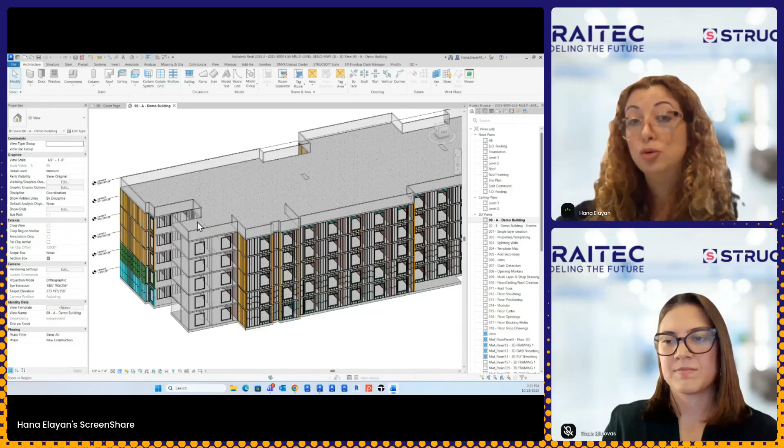Perfect, perfect, okay. So first of all, for those of you who are not familiar with the software, this portion is for you, where I will cover what the software is, really generally speaking, and two of our very well-known features specifically, template maps and quick create.

First of all, our tool is called StrucSoft. It was previously known as MWF. It's a Revit add-on or a Revit plugin. That's why you can see over here that I'm in the Revit environment. This tool is dedicated for framing, and we're going to be framing a few walls live in this presentation, okay?

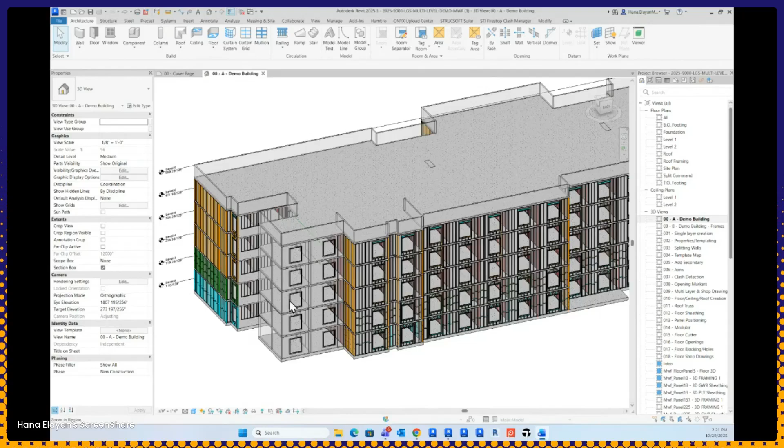First of all, I'm just sharing one of our demo models, and you can see here what you can expect to achieve with StrucSoft, just as an example for a few framed walls. And over here, I've left a few walls empty so that we can frame them live, okay?

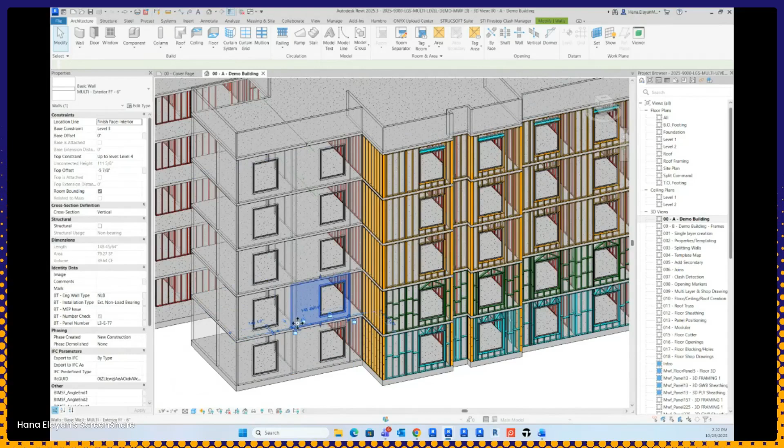So keeping in mind that StrucSoft is a Revit add-on, we do need a Revit model before we can start framing. These Revit elements, like the walls that I'm selecting right now, will act as hosts for the framing that we see over here. So this framing is going to be embedded within the walls, okay? That's why you'll notice that I added a little bit of transparency to the walls of my model.

First of all, when you install the software, you can see that you'll have an additional menu. You're going to have this additional ribbon within your Revit ribbons. You'll notice that it's color-coded.

And if I go to the first button over here and I switch to the wall module, this is the module that DBC are using. So this is the module that we're going to focus on today. You'll notice that the menu expands in blue, and these are the features that you can use for walls. I'm using Revit 2025 for today, but we do support other Revit years as well.

First of all, I will just cover really quick how we prep the model. You're going to need some Revit elements. In this case, we're going to need some walls. Doors and windows have to be added before, but don't worry about changes. The software, you can make changes and regenerate your panel, and this will accommodate your changes.

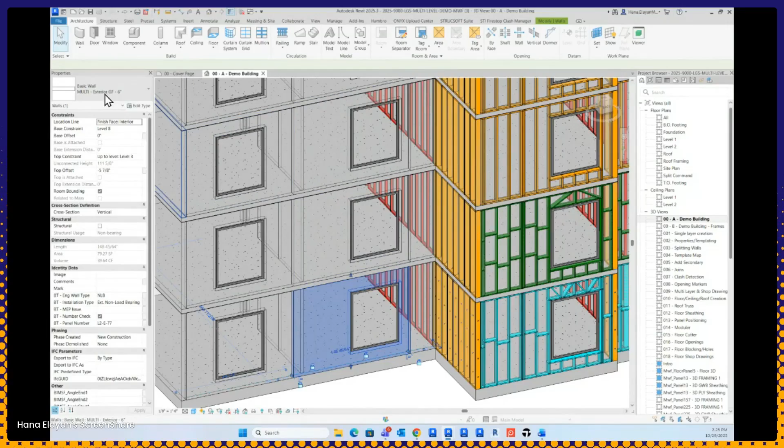Before we start, I just want to highlight that I have a few wall types already prepared for this presentation. So when I created my model, I gave my wall type specific naming. This is going to be very useful later when I add create template maps. This specific wall is meant to be for the ground floor, and I would like to frame it with a template that looks like this.

This wall over here is for the first floor, and I would like to frame it with a template that looks like this, and etc. This is an exterior wall for the upper floors. It's meant to look like this, and I also have interior walls in my project. So just like any project, we have multiple wall types.

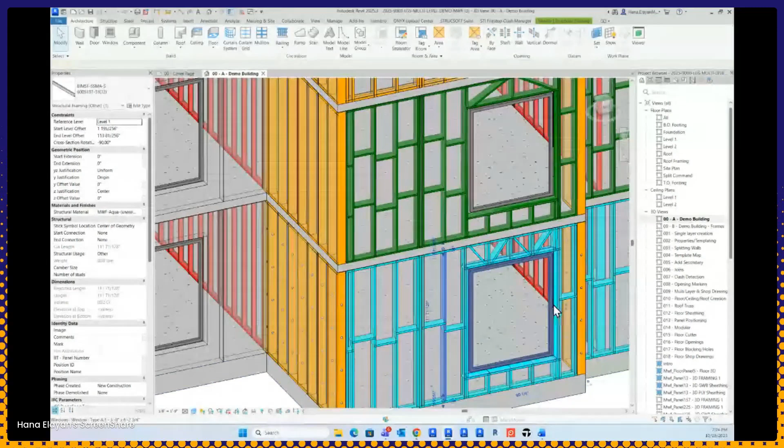This brings us to the topic of templates. So what is a template? Templates are basically the characteristics of a certain panel, including specific features, family types that you might be using, opening details, and other features as well, like adding horizontals and etc. The way it works is that you start with an out-of-the-box template, and then you customize it and you create your own.

You start by creating the Revit wall. You go to the Create tool. You click on Create. You choose a template out of the box. I have my own templates created already. I will use these later. I have one for the ground floor, first floor, etc. But for now, I'm just going to show you a default out-of-the-box option.

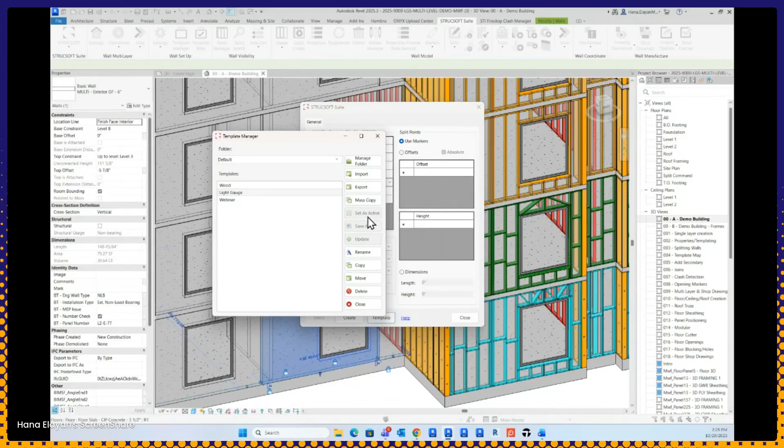I have something called light gauge and wood, and something that I had just pre-created. But you'll receive, if you're using StrucSoft Suite, you'll also receive wood templates as well. I'll be using light gauge for now. I'll set it as active, hit close, and I'll hit create. And this will create my first panel. From there, I can start to modify this panel in order to create my template.

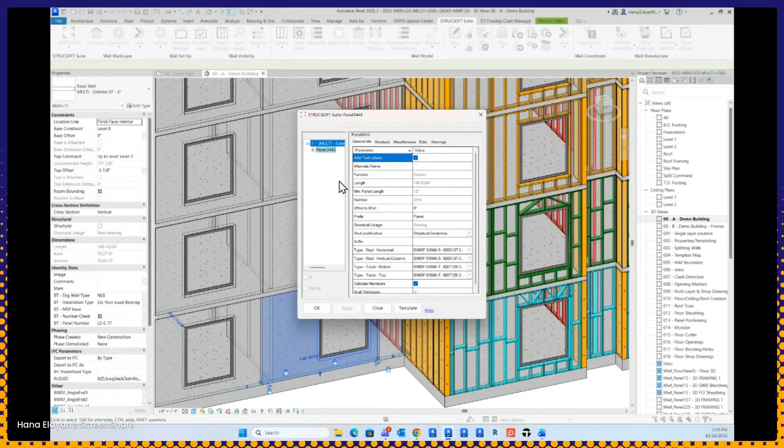I'll receive this dialog box where I can make changes, but for now I'll skip that and say OK. Perfect, so this is our first panel. It's a very simple panel.

There's nothing fancy here, but I can start to add more and more features, which brings us to the topic of the properties preview menu that we're very excited about because we've improved this feature and it's looking really great. In the panel settings, you can make changes to your studs, like the horizontals, vertical, bottom, top.

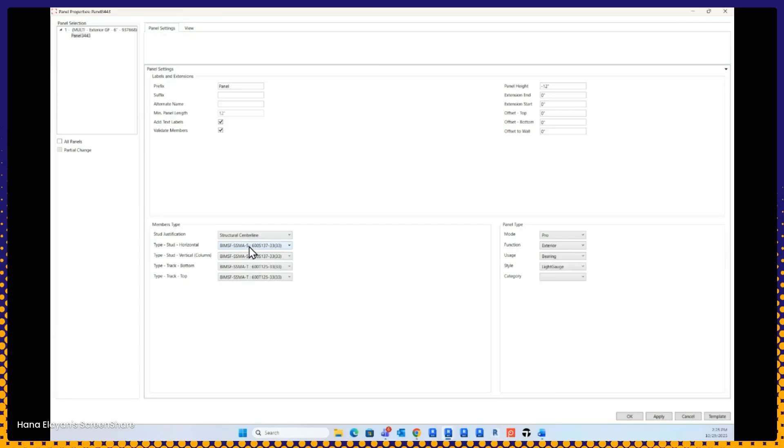You can add your own Revit families. You do receive these types out of the box. If you go to the view here, you can see that we have available features, and here you can see a preview of your panel.

You can start to add features. For example, I'll just do something easy for today, like adding horizontals, just to show you one of my personal favorite features. So I'm going to add horizontals from the beginning to the end of the panel. I will choose the family that I want to use. I just picked something like this.

There's the justification, you can split the horizontals, you can add a stagger, you can also insert clips and add punches, but I'll keep it very simple for now. You can add the number of horizontals. I'll click on add, and then I'll click on apply.

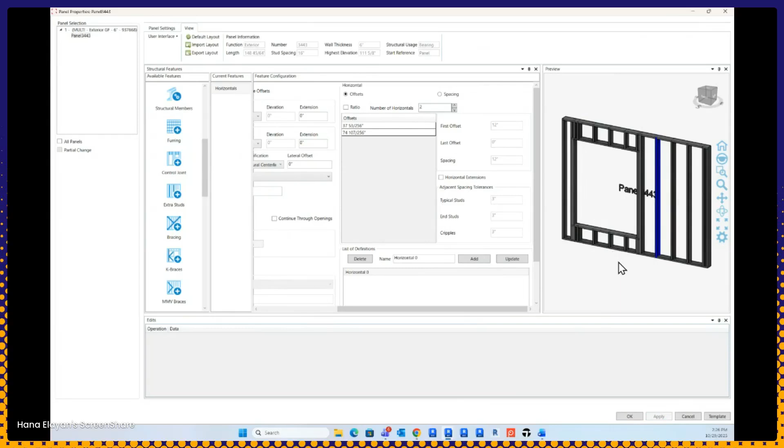And here you'll start to see the changes happening in your panel in this preview. Then when you're done adding your changes, you can go to template, save as, and you can save it in a folder and call it whatever name you like and use it over and over again.

Let me just call this webinar 2, for example, and then you'll find it in your folder and use it over and over again.

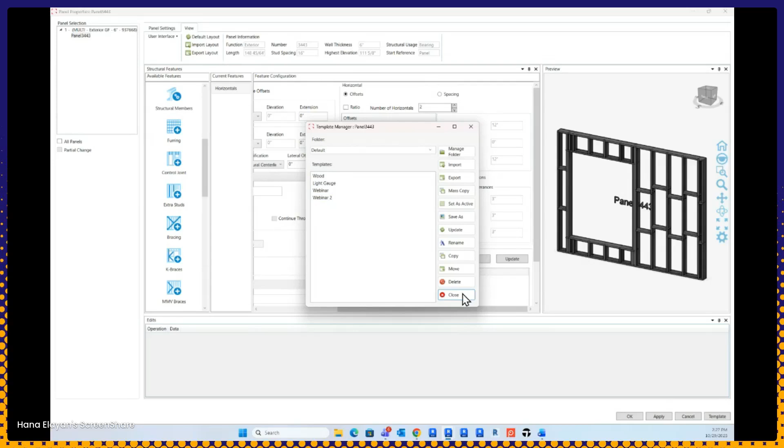And here you're going to see the end result. So I've already pre-created some templates. Let's try them now, but now we're going to talk about another very important feature, which is the quick create and the template map.

Quick create is the feature that automates this process so that you don't have to panel one wall at a time. The quick create tool is used in conjunction with the template map that I'm going to show you right now.

You can create multiple template maps, as you can see here. I already created several, but I'm going to use this one right now. This basically tells the software what to do when it finds a certain Revit wall type. You can see here that I have different wall types I can choose from this dropdown, so I'm basically choosing Revit wall types and matching them with StrucSoft templates that I've pre-created.

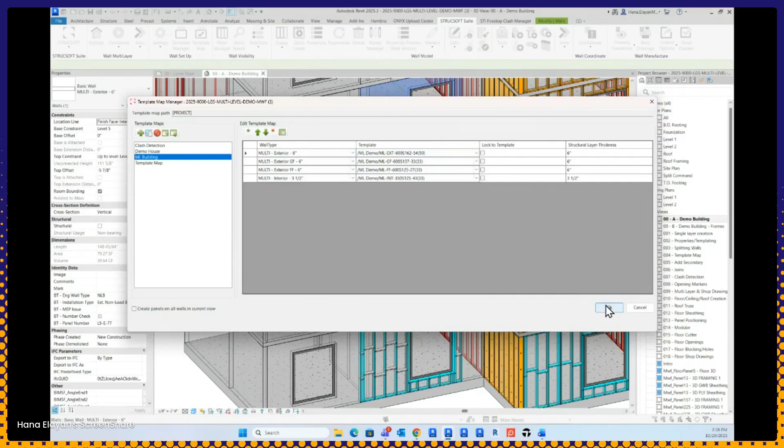And I need to make sure that this is highlighted in blue. I hit OK, and now I'm ready to frame my panels. To frame my panels, I need to make a selection, just like you see here, just a regular Revit tool that you use every day.

I've selected 5 walls. I'm going to frame them all at the same time, and they're going to look different, since each one of them has a different template. I'll hit the Quick Create tool.

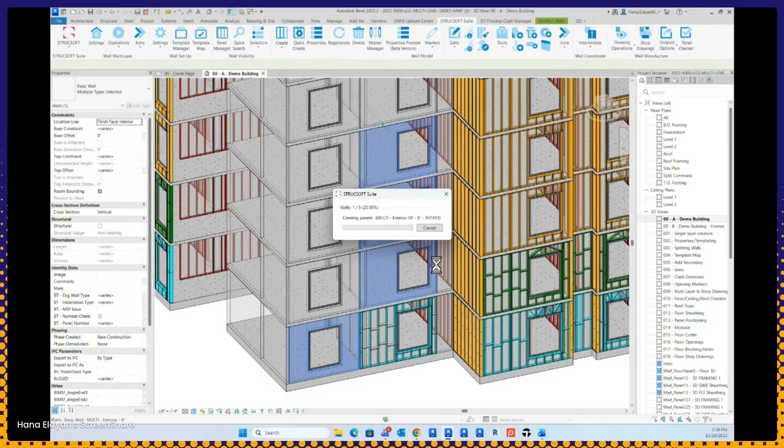What's happening now is that the software is going to start framing. It's actually matching wall types with templates, just like we specified. The time frame will vary, depending on how many panels you're framing at the same time, how big the project is, how complex your panels are. Of course, it also depends on your device, so the time frame will vary.

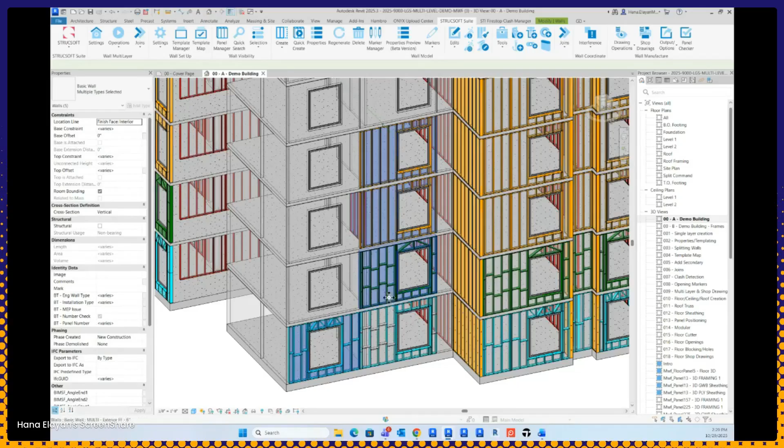Okay, perfect. I thought it would take longer because I'm sharing my screen and in a call, but it wasn't bad. And here you can see that the software has framed these panels using the templates that we specified.

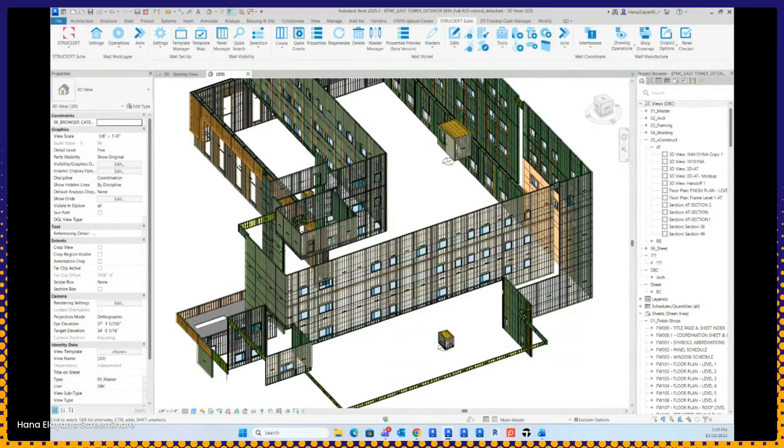Now that we're done with the first portion of the presentation, we're going to jump into a model that was actually provided to us by the DBC team. Thank you so much for this wonderful model. I'm using a model provided by the DBC team, showcasing some of the features that they like to use. We're going to focus on a few specific features that the team has mentioned they really like, one of them being marker lines.

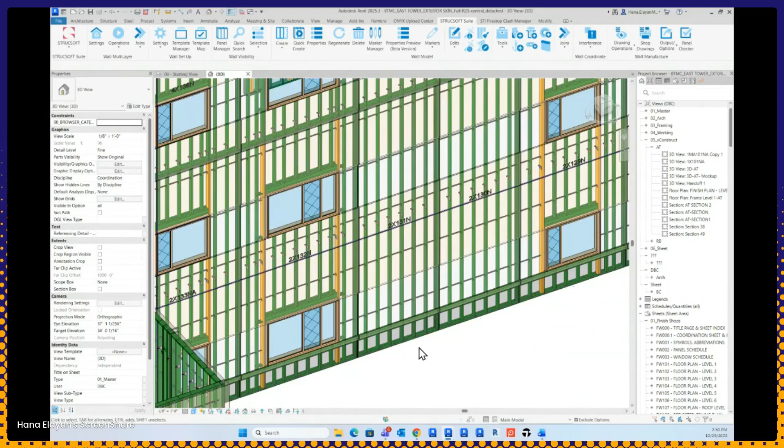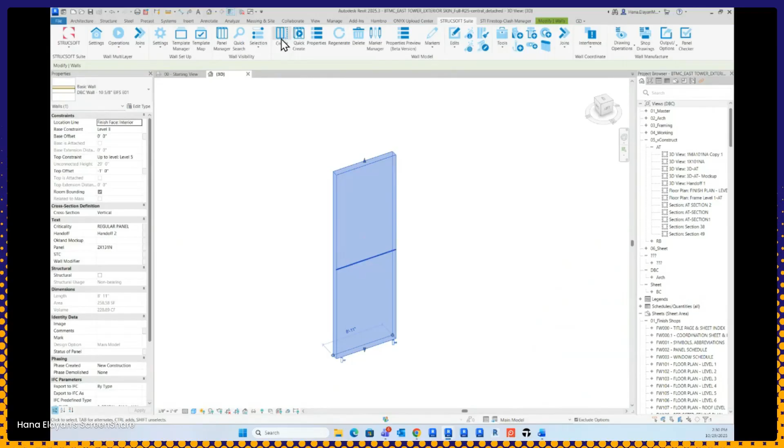To do that, I will start with an empty panel. I'll create a wall first, using a Revit copy, and make this wall over here. Let's isolate it, I hit BX on my keyboard. This is a wall type, and you can see that DBC have their own wall types. I will start by using create, and I'm going to choose a template, something like this. I'll set as active, close, and create.

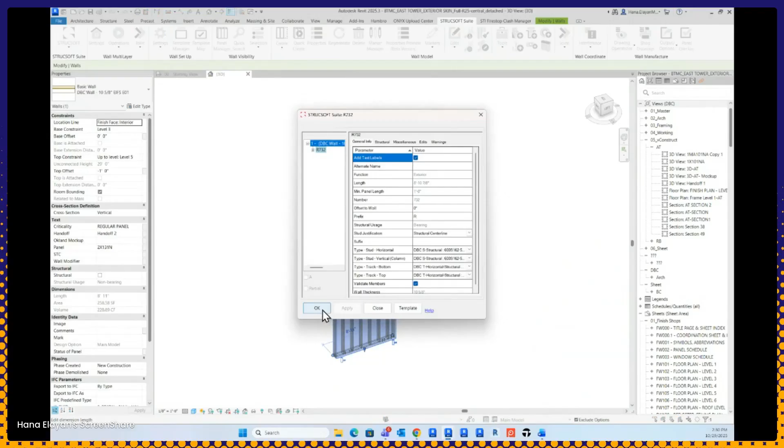I just created a panel, and as you can see, their template already has some very neat features. It has their own family types, and it also has, for example, here they're using an anchor bolt, which is another tool that you can find in this software.

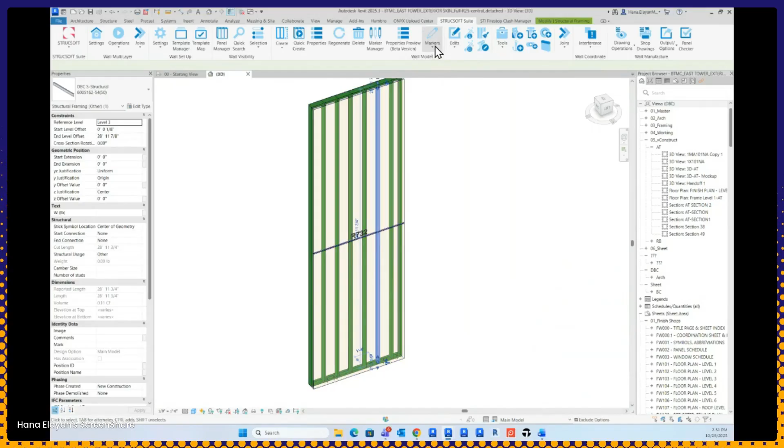I'm going to be talking about marker lines, which is a very popular tool that will allow you to create different things. DBC likes to use marker lines for their CRC channels and punches. To add a marker line, you select a member of the panel, go to markers, and click on Create Marker Lines. From this dialog box, I'm going to choose horizontal lines.

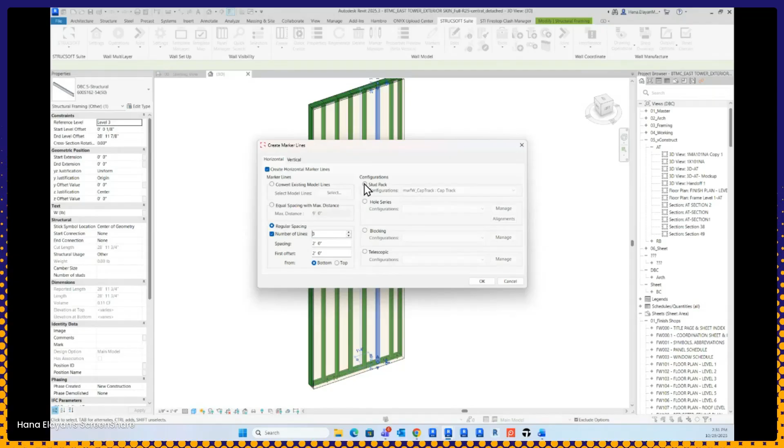Regular spacing, I'm going to use 3 lines. That's all I need for right now. You specify the spacing and the first offset. You can, by the way, add the features right away, a hole series, blocking, and other configurations, but I'm not going to add them now. I'll come back to them later. I'm going to say OK, because I wanted to show you how the marker lines look before you add any features. They look like regular Revit lines.

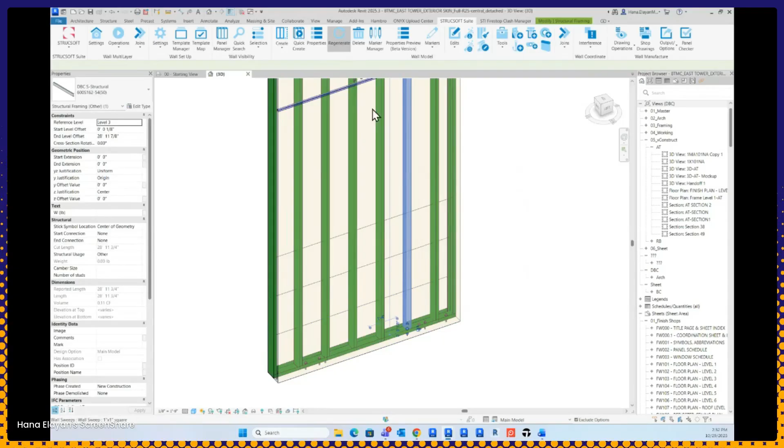They are regular lines, but in the back end, they're also coded with StrucSoft features. To add a feature, I need to select this line, go to the properties, and here I'm going to choose blocking. I'll add blocking first, using this one right here. I'll say OK. You won't see anything until you regenerate the panel. And there it is - this is the CRC channel.

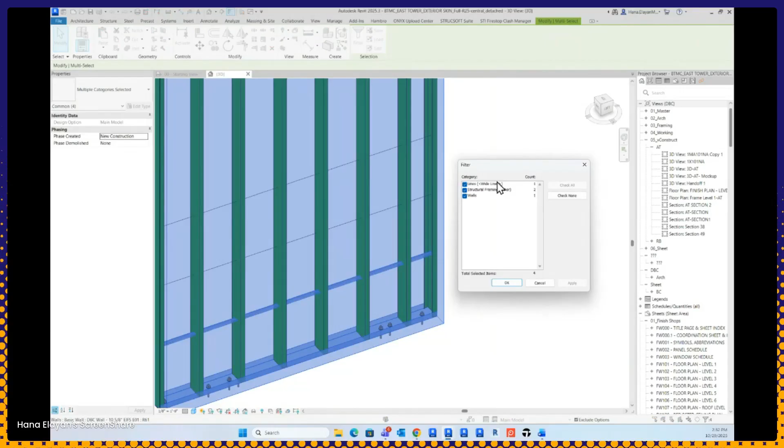What I can also do is add another feature as well as that feature. I just made a selection, I'll use the filter tool just to select that line again. And I'm going to add another feature, going to the properties, and add a punch basically. I'll use this one, and I'll say OK. I'm going to regenerate the panel. And here's the end result.

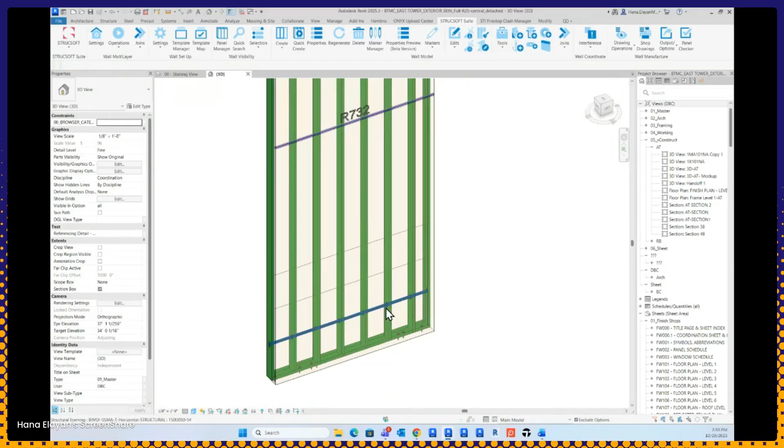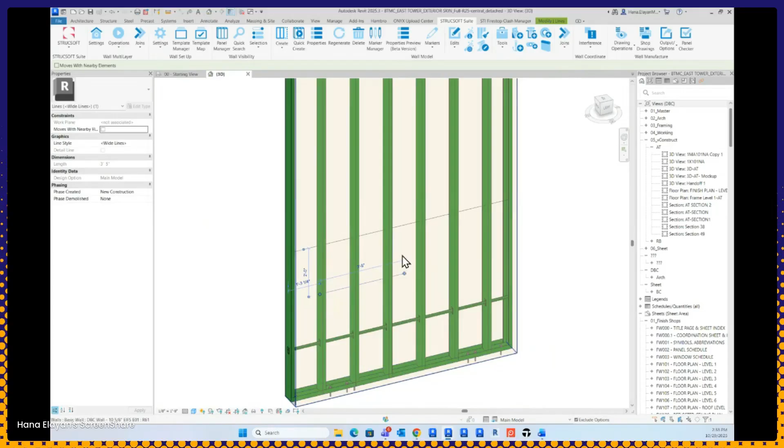The cool thing about these marker lines is that they're very, very flexible, not just the features you're able to use them for, but they are flexible themselves. I'm going to move these lines to specific locations like this. I'm actually going to keep one a little bit extended on purpose just so you can see what you could do - you have the option to extend it or not.

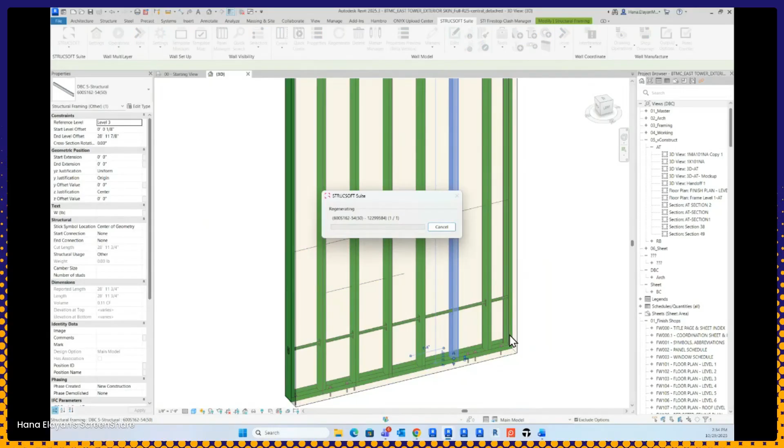And I'm going to add these features again using properties. I'll use the same blocking, this one, and the same hole series. I'll say OK, and when I regenerate, this is the end result.

Sorry, I'm just going to switch maybe to my headset. I just want to check with my team. Does it sound better? Is this better? Okay, perfect. Sorry about that.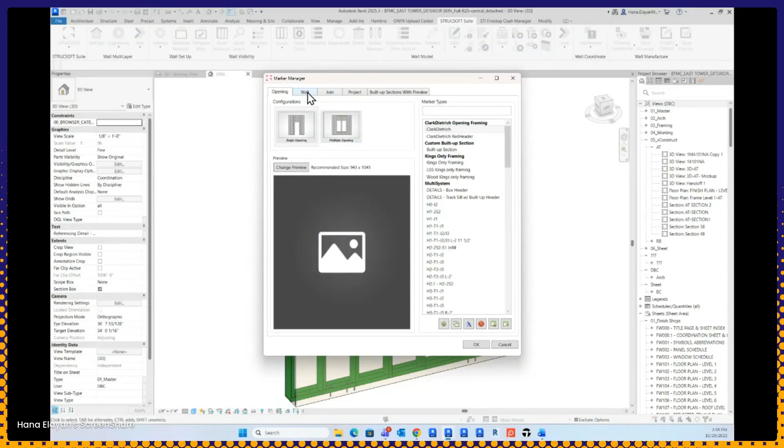The last feature I wanted to showcase is that the DBC team also likes to use marker lines for their cap tracks. I'm going to show you where to find those cap tracks. You can find them in the marker manager. If you go to wall, framing, you can see that you can add the cap track feature from over here, and you can make changes to that feature. You basically start with the out of the box one, duplicate it, and make your own. You give it its own name, and then you can use it over and over again. But this is not where you add it - this is just where you configure it.

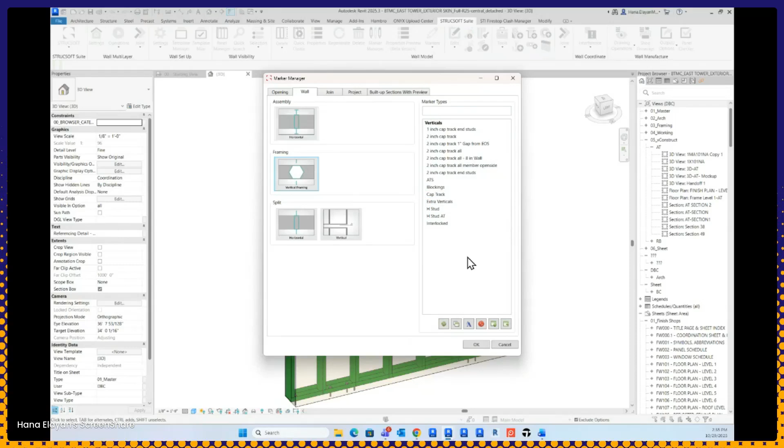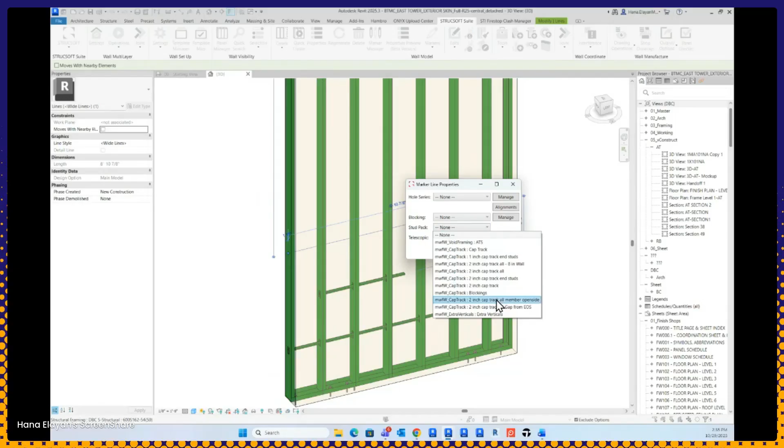So to add this feature, you need the marker line, and you'll also need its properties. You can see over here that we have an option for stud pack, and you can choose it from here. I will use this one. I'm going to say OK and regenerate the panel.

And this is the end result. One last feature, and then I'm done with this presentation. I'm just going to remove the section box.

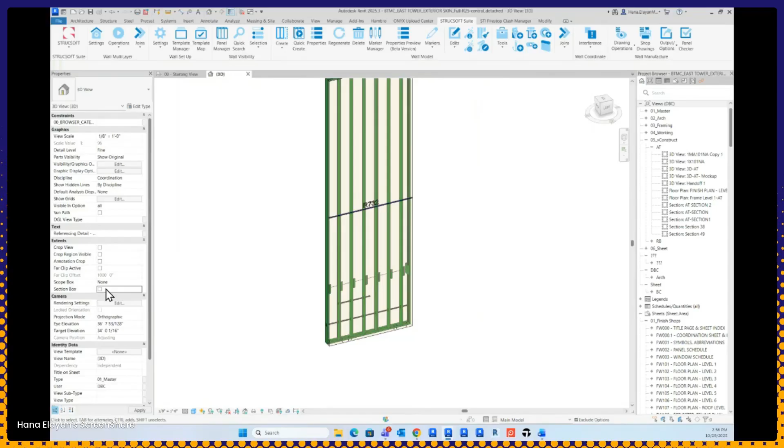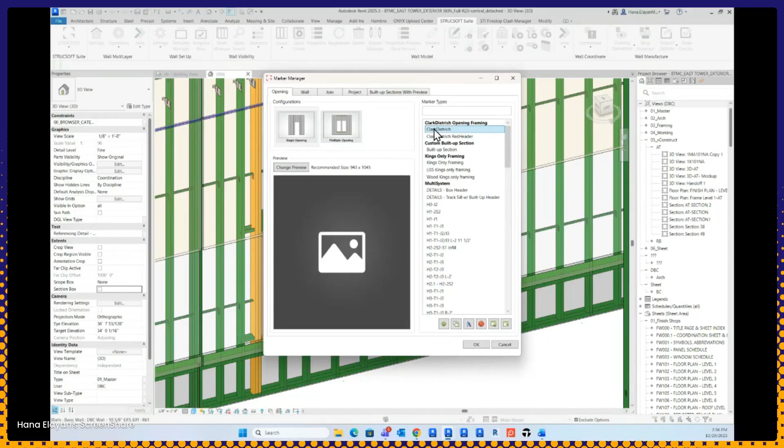The other feature that the DBC team have mentioned to us that they like to use is our out-of-the-box header for their openings. This can also be found in the marker manager. I'm just going to show you where to find it. So under openings, you can see we have multiple out-of-the-box options for your opening details. We call them markers. This is the out-of-the-box multiple built-up member system, and you can basically duplicate it, rename it, and create your own variation. And this is the one that we are using in this model.

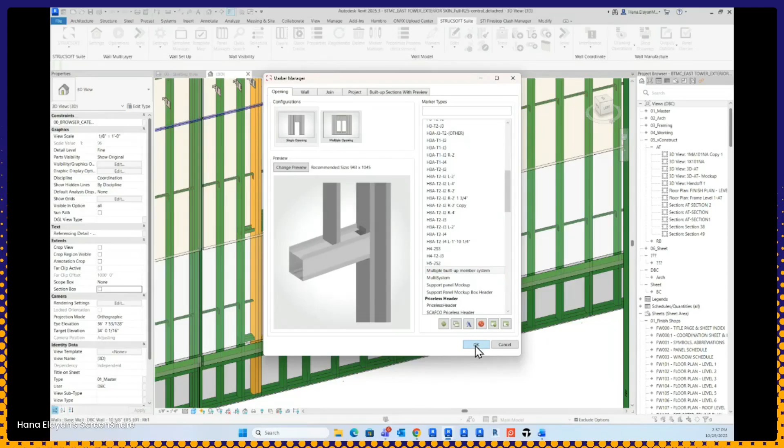I'll say OK. To add it, you have two techniques. One technique is to add it to the opening itself. So you select the opening, you go to markers, apply opening type, add the framing type from here. You select it from the dropdown, you click on the plus. When you regenerate it, you'll see the end result.

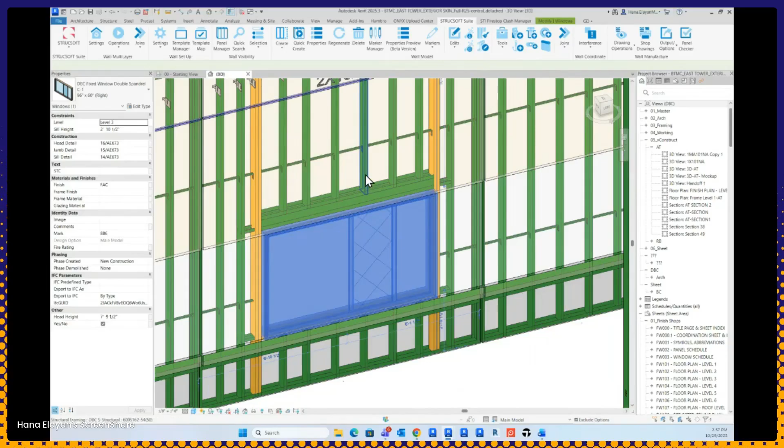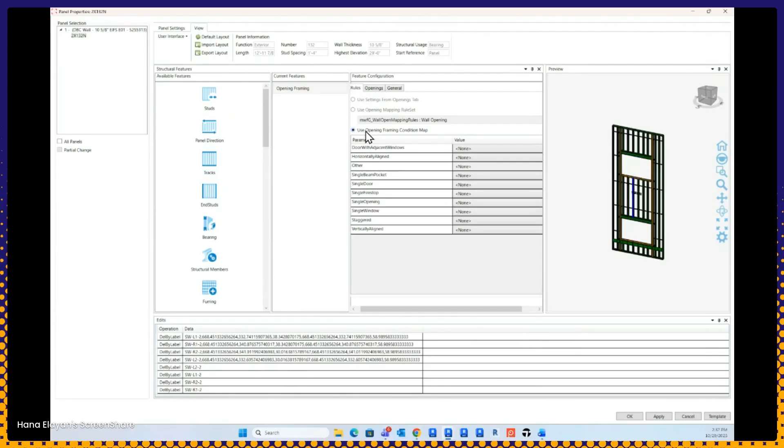The other technique that you could use is to add it through the properties. Basically, this is how it can be added to your template through the view. And if I maximize this, you can add it through... sorry, I'm just looking for the opening framing. You can add it from here under rules, use opening framing condition map, and apply it to all your windows from here. So that's just another technique.

And that's pretty much it for me. Thank you so much for listening, and I'm going to hand the mic over to Thais. I will stop sharing my screen.

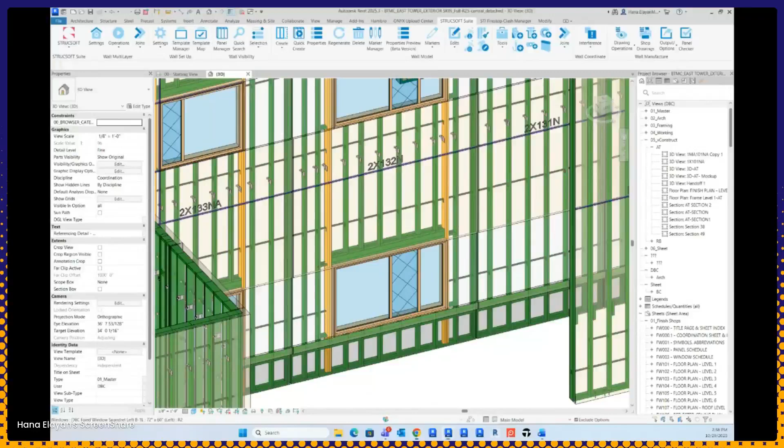Thank you so much, Hana. Great presentation. Thank you. And also, just to add to what Hana was showing, as you guys can see, we have a lot of features and a lot of ways of doing the same thing. So people can just choose what fits best for their workflow.

For example, for the CRC channels, we showed the marker lines. It could also be added through horizontals, for example, but marker lines are more flexible and very easy to use. So it really depends on the workflow and what's best for each company. We try to focus here on what DBC usually uses and what fits best for their workflow.

Also on that note, Anand, I think you also mentioned a little bit about the evolution of the software, both Strucsoft and Revit, because you guys have been using it for so long. Do you have anything to share about this? How do you feel that evolution happened, and what do you see happening in the future? How do you wish the direction we take from now on for the industry, for the future, how do you see that being beneficial for your company?

Yeah, so when I talk about evolution of the software, I have seen a lot of features added into the software over the last 8 years. We had simple wall templates. Then we went ahead and started with wall mapping. We now get to build custom headers, which is a really nice option in case any of the framing configurations don't exist in the software. You can modify that configuration and add it, so this is really a cool feature. You can customize everything. The one thing I'm looking forward to, which we've already talked about in our regular check-ins, is the integration of AI, which I know is in your pipeline. That will also be really helpful to take the software to the next level. But yeah, a lot of things, the whole evolution, like how the engagement of the Strucsoft team with the DBC team is going on, this is really helping us to game plan things and make sure our needs are met.